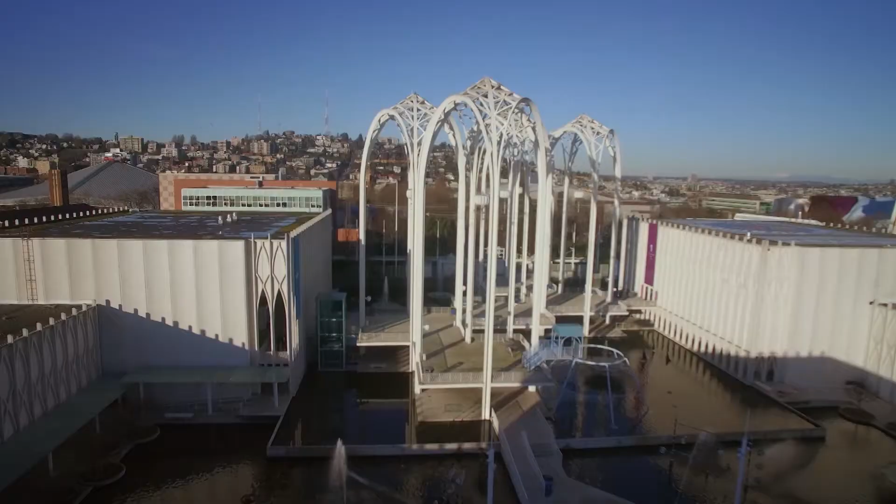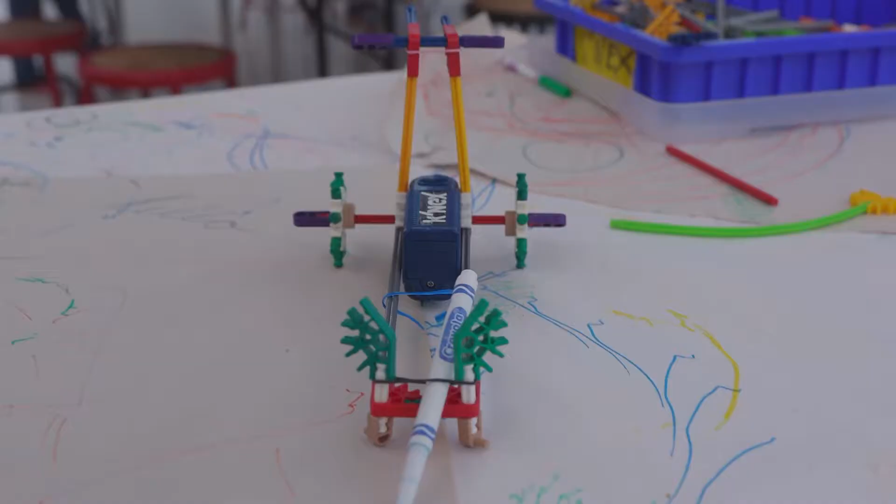For nearly 6 decades, Pacific Science Center has been the place to ignite your curiosity and to experience discovery, experimentation, and critical thinking. My favorite things are going to see the bugs and the butterflies. I love the laser light show. 3, 2, 1.

For years, Pacific Science Center has been a partner with the school systems around the state to bring science into the schools in a way that enlightens science education. We serve over 1 million people every year, several 100,000 out in the community through our outreach programs, most notably Science on Wheels. Look to your left, look to your right.

More than 85,000 of those students this year will be part of low-income families. Yes, if we squeeze it.

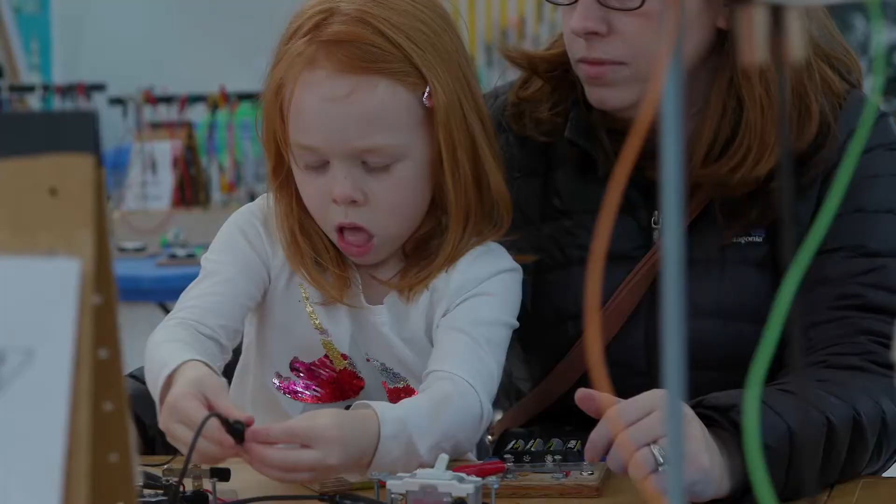We want to be a laboratory, a living room where conversations about science take place. We have undertaken a comprehensive program that includes deeply discounted memberships for anyone on public assistance, that provides free memberships to any child up to age 21 in the foster care system or experiencing homelessness.

Accessibility is really important for us here at the Science Center. When you work at a place where you see so many excited people and so many inspired people running around, we just want to make sure that people all over the state, from whatever backgrounds they come from, are able to enjoy that with equal access.

One of the big changes that I see in Pacific Science Center is its effort to be increasingly relevant to our innovation economy in this area. We have startups now that bring what is reality to life for people who have no idea about where all this future technology is coming from and what it's enabling.

We're just thrilled to be collaborating with NHL Seattle. It's consistent with our goal to be a platform for innovators. And what we're hoping is that people will come here and see this preview center and be inspired, but they'll also be inspired by what's happening right next door on the other side of this wall at the Pacific Science Center. We are really, really excited about our new evening series that will be showcasing science and technology of sports and entertainment.

You think about the game of hockey from a science standpoint. Physics play a big role in the game and geometry, and so the ability to explain our game and what we're doing through a partner who's in that business is really remarkable. Seattle is really a wonderful place for innovation and invention, and we've really brought into the building some of the latest, coolest technologies that are going on in our community.

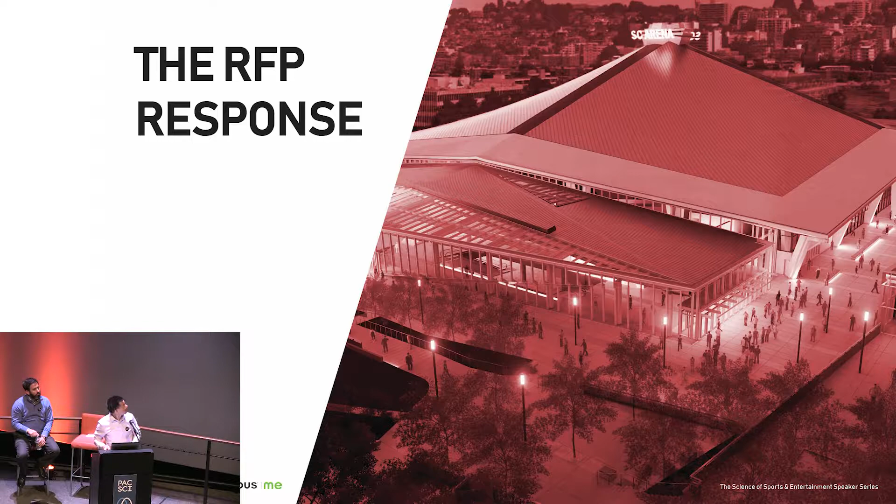Let me advance to the next slide. Okay, so what I'm going to do to start is talk you through some of the evolution of the design process. Like Sean mentioned, this project has been in the works for a couple of years already, and it has flown by. Right around the first of the year in 2017, the city of Seattle issued an RFP for the redevelopment of the arena. I'm not going to go into all the details of this RFP because it's quite extensive, but I will highlight a couple of the primary goals that you'll see on the screen as well.

Of course, the world-class arena for music, entertainment, sports, the NHL, the NBA, and to design and operate the arena to really enhance the connection to the Uptown neighborhood, integrate with the vibrancy of Seattle Center, and to align with the Seattle Center master plans. This building uniquely is part of a campus, and not a lot of the professional arenas that we do have that type of scenario. So it really does need to respond to the urban context, the neighborhood context, and the campus that it lives on. That's been a real important part of our design.

So that's where our job began, and our first step was to essentially create a framework of design principles or design goals for the building, much like the goals that were set out for the RFP. We drew from several influences: our collective expertise on NHL and NBA arenas and sports facilities in general, and the historic arena itself, dating back to 1962. And so here's what we came up with.

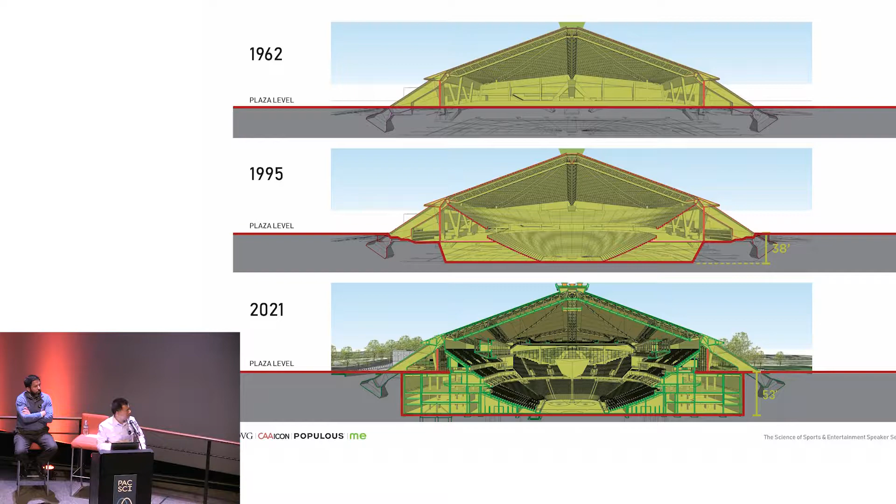And we chose to locate that on the south side of the arena. We've kind of rotated the plan on you, so north is to the left. But we chose to take advantage of that kind of newfound space that Sean also discussed. The current service end of the building where the loading dock is and the marshalling area, turning that into kind of a new front door. And I'll talk a little bit later about how we're able to do that from a service and a load-in, load-out standpoint. But we looked at adding the new entry atrium on the south.

And at the time, there was a parking program, an on-site parking program for approximately 850 cars that we were also looking to accommodate. So that was basically between the new atrium and Thomas Street. But what it did was it aimed to create a new gateway, really a new gateway and access point into Seattle Center along Thomas Street, extending from kind of the west edge of the center out to Uptown.

And so those were kind of two of the primary moves in the RFP phase. You'll notice, and I'll touch on this a little more later, but across the street - so this is the Bressi Garage where Pottery Northwest is currently.

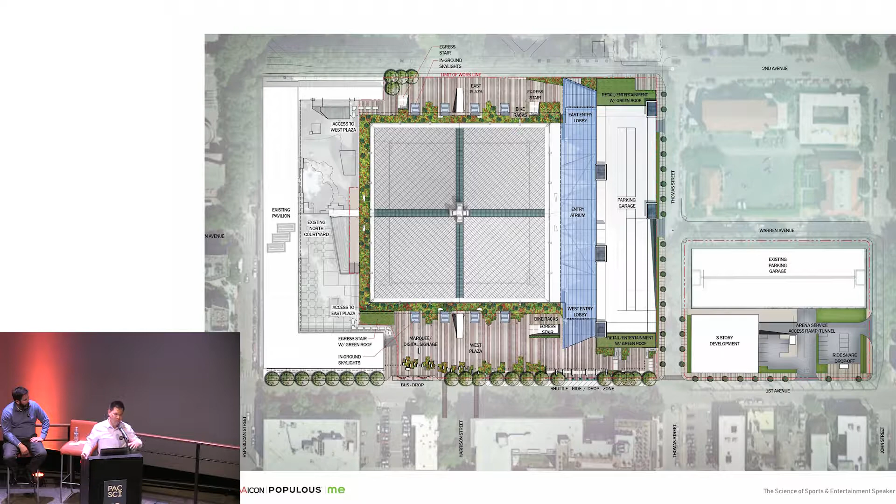One thing that was also really one of our major design principles was exposing some of the glazing on the north side of the building from within the seating bowl. Currently in Key Arena, you can't see the exterior from within the seating bowl space—the seating bowl itself kind of shrouds the space, it wraps the space, and you're cut off from the exterior.

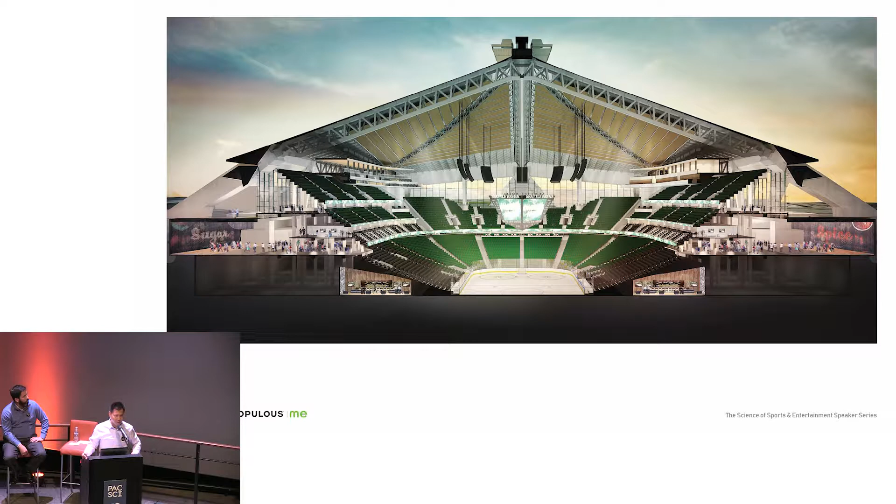So a couple other quick renderings showing the initial proposal. This was the atrium that we first came up with—this was, again, almost two years ago. You can see kind of the remnants of the parking garage that existed then.

And then a section cut through the new south atrium. One of the principles at the time was to really celebrate this new internalized south foundation, or the south buttress as we call it, that is going to be the unique one out of the four, because it will become internalized and celebrated within this new multi-story atrium. That has held true through the design evolution to today—that south buttress is really going to be celebrated in the new entry hall, and I think it's going to be a magnificent feature.

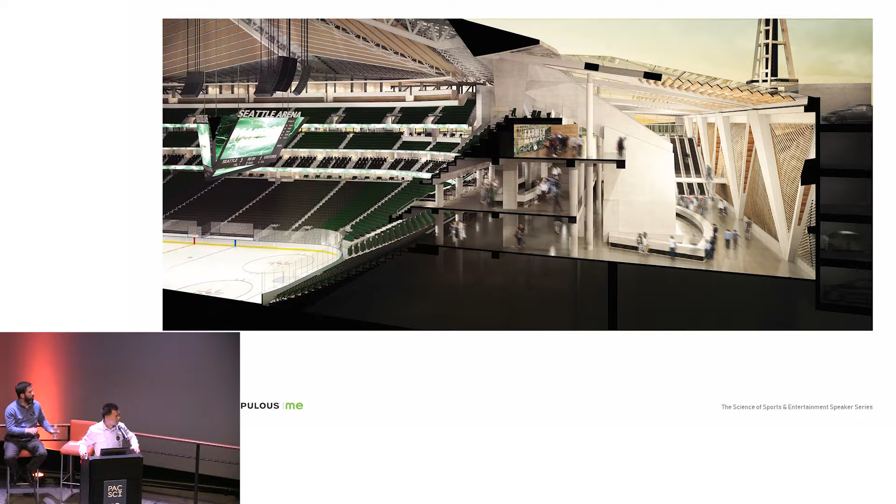And then again, about a no-compromise design. From day one it was all about hosting world-class events, the variety of events that the city will want and love to see in this building. So we're always thinking and designing not just for a sport, not just a couple of sports, but the whole breadth of entertainment and sports that are out there in the industry.

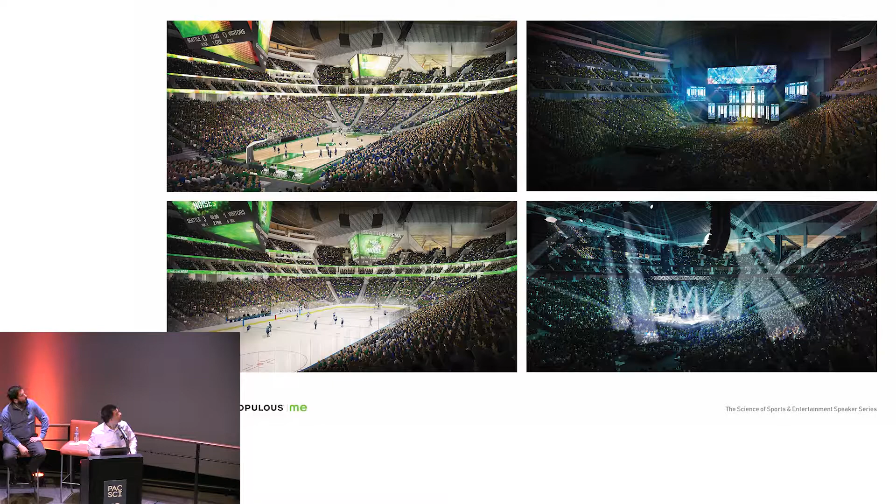So, design evolution—fast forward a couple years. It feels like my job is tough tonight because I have to cram two years of design evolution into about 15 or 20 minutes. But there were a couple significant events that occurred after the RFP phase that I think ultimately drove the design evolution, or most of the changes to the design.

I think first and foremost, the development team, Oak View Group, determined that the south side of the arena should be even more pedestrian focused. Initially we talked about it turning into a pedestrian and vehicle new gateway into Seattle Center.

I think they made a commitment that it wanted to be all about pedestrians, just like the other plazas surrounding the building on the east, the west, and the north sides. So that was one element.

The second was that the arena received its official historic designation by both the local Seattle Landmarks Preservation Board, as well as the National Register of Historic Places, like Sean mentioned. Those two things became official after the initial proposal, and then we went through a rigorous process of review, evaluation, and approval by those landmarks entities, and they've really helped shape the design, and I think it's absolutely for the better.

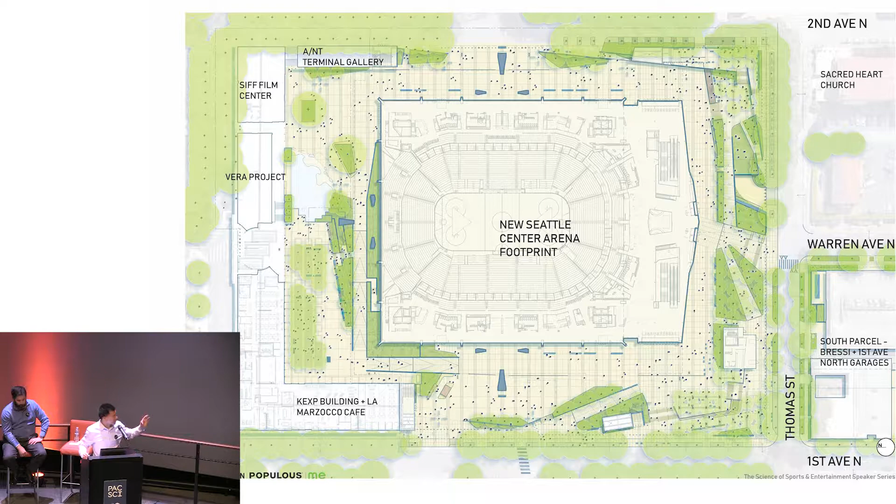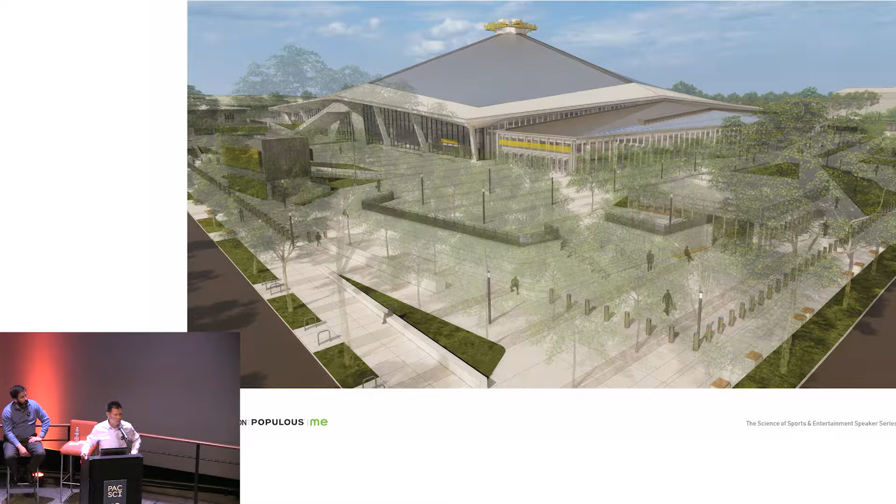So that gave us the opportunity to establish this transparent lens into the historic building that Sean mentioned. The design of the atrium, which we'll touch on more later, is really about maintaining views, sight lines, and celebrating that historic structure beyond it. It almost wants to disappear—it's a transparent lens, a transparent layer through which you can see that historic structure.

So this is the current site plan, and you'll notice a few changes compared to the one we showed previously. First off, the atrium got substantially shorter in its length. It was 440 feet long in our initial proposal, accommodating a lot of new lobby space, circulation, stairs, and escalators. It was a circulation spine for the building because we're digging so deep into the site.

We need to move people efficiently with stairs, elevators, and escalators. So it was 440 feet in length, and through our processes with the local landmarks board and the National Park Service as well, I think we all came to a consensus that the atrium structure and its architecture really had to be secondary in every way to the historic roof. At 440 feet, it was extending beyond the length of the original building on the east and west sides. The dimension of the current arena from one side to the other is 360 feet.

So we worked really hard to create a more efficient design, consolidating some things in the atrium space to reduce that overall length, and in the floor plan view you see here, made sure the atrium was no larger than the historic arena itself. There are a couple other strategies we'll look at here in a bit that also help that atrium remain secondary to the historic roof.

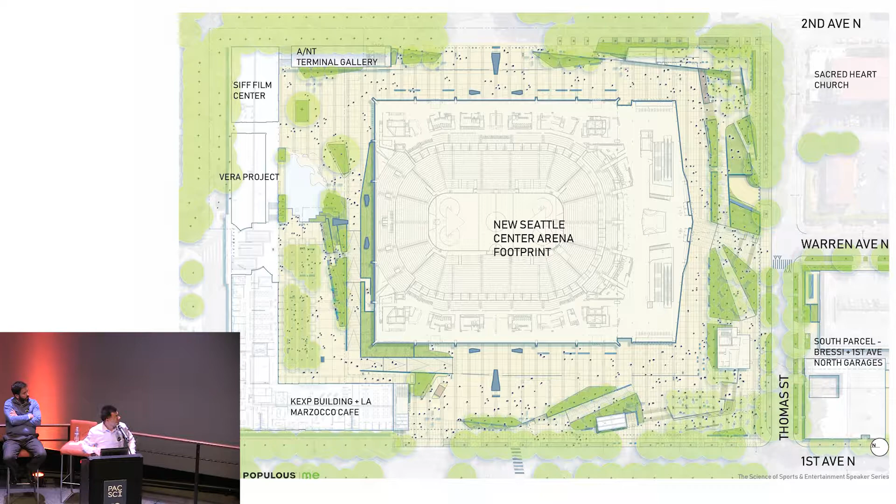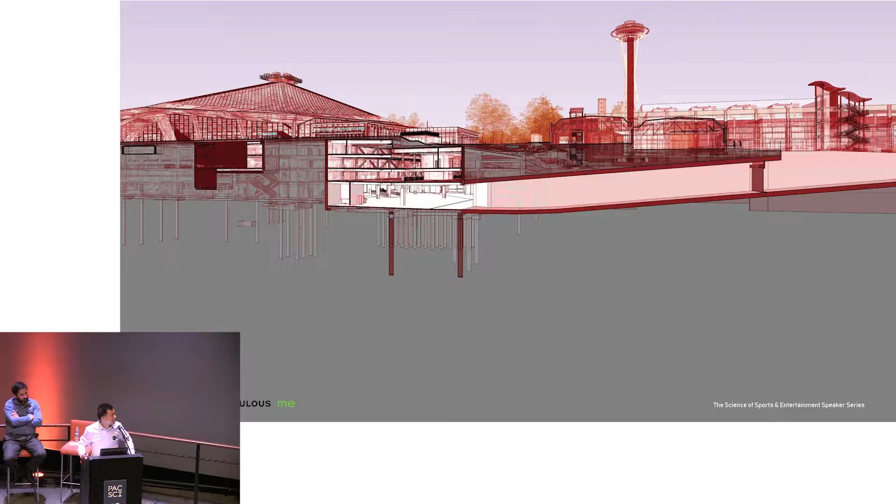So I think, again, Sean mentioned this arena doesn't really have a back door like a lot of maybe urban or civic arenas do. And I think this was kind of our design solution to allow that to happen. And then here's a quick image showing the current design and the design of the atrium. Again, you may notice a little bit of design evolution there from the initial proposal renderings.

Again, that idea about always making that atrium secondary in its form, its height, its scale, even its materiality, make it secondary from the historic roof. So here you can see that the materiality is very distinct. So there's always that distinction between the two. That's something that's very critical in the world of historic landmark design. Any new addition wants to be visually distinct from the historic structure. So we're doing that through materiality.

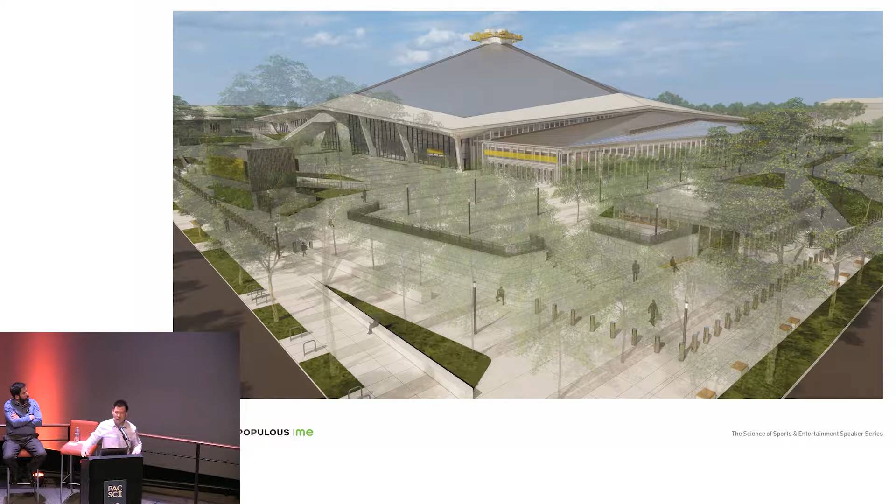You can see that the scale and the height of it is also secondary. It always maintains your view to that historic roof line that is so powerful, and that will now be very visible from the southern portion of the site and beyond. And then, like I said, the reduction in the overall length of the atrium allows essentially the corners of the historic roof overhang to always extend out past that new atrium east and west facade. So you're always going to read those prominent corners of the historic arena.

So one thing I want to talk about here, there are a few other pieces to the architecture that I would say are very unique, again, because of this subterranean nature of the building. And Jeff will get into a lot more detail on how these elements operate. But the new architecture, the visible architecture, like we've been discussing, is really limited to the atrium. The other three sides of the building are essentially refurbishment of the historic facades. We're not touching the roof. And so where's the rest of the architecture here?

And what's interesting is it has basically become these 4 or 5 much smaller site buildings that serve very specific functions. And I'm going to talk to you about what those functions are from an architectural standpoint. But you can see them here. They're essentially pulled away from the building so that they don't impact, again, that historic look and feel of the building or those historic views to those facades. They're pulled out to the site perimeter or the site edges.

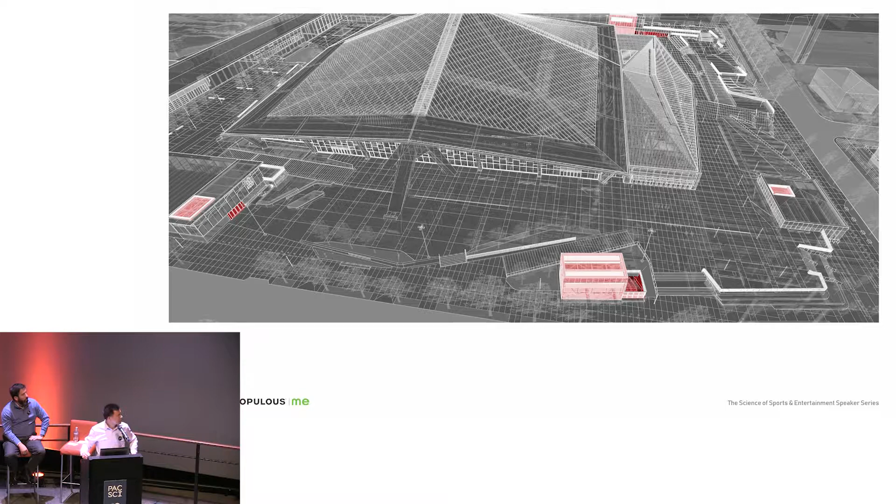And if we do a little bit of a cutaway section, this is from the same vantage point, you'll see that they're essentially a termination point for some underground tunnels, for lack of a better term. We've nicknamed these elements the snorkels. So Jeff will tell you what the snorkels do, but I bet some of you have an idea based on that name what they do.

From a circulation standpoint, everyone's been in public assembly buildings, arenas, stadiums, exit stairwells, right? Important thing. Usually you're taking a stairwell down to some point and then exiting it. Great. In our case, you might be taking a stairwell up and then across horizontally through a tunnel and then out to the side. It's been a really interesting part of the design and challenge that we've had to deal with. But effectively, if I were to trace a line around the seating bowl, that's kind of where the historic facade exists above. So this starts to show you the amount of expansion that's happening here below grade.

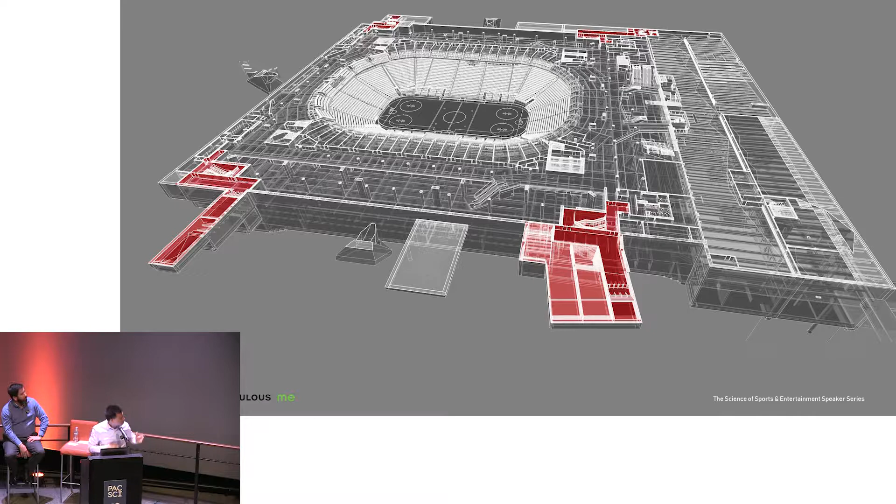And when we bring these stairwells up in the corners of the building, they're outside the original footprint. So our strategy was to push them even further out into the site so that they don't detract again from the historic landmark. So that's what that graphic is trying to show. These last few images here will be another series of cutaway sections. So this is an aerial view looking at the atrium, looking to the north. And again, you'll see the scale and the size of the atrium in relation to the historic roof, always secondary.

Maybe I'll ask a question to the audience. There's a skylight right here. Anyone have an idea why it's shaped like that and why it's positioned right there? There you go. I think I heard it. Yeah, a lot of you guys got it right away. Yeah, it is an absolutely amazing vista up to the Space Needle. Obviously, one of Seattle's iconic landmarks as well. So from within the building and within that new atrium, there's going to be just a phenomenal connection to that local Seattle landmark through that skylight.

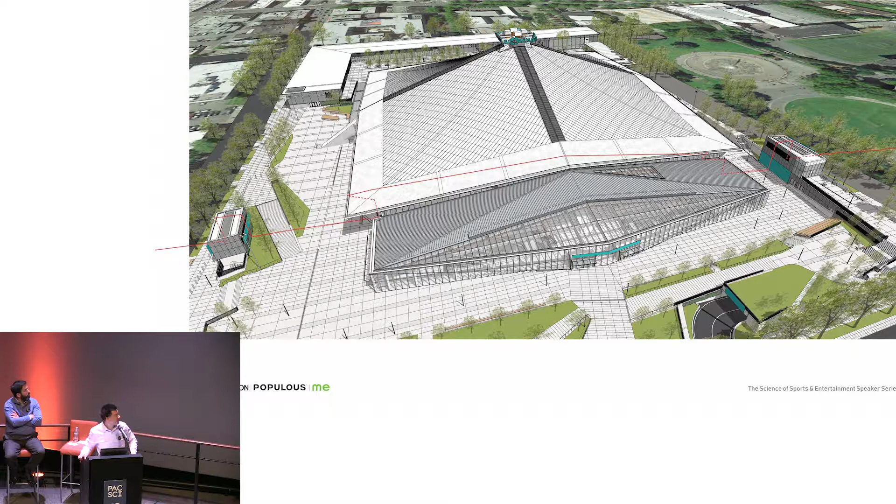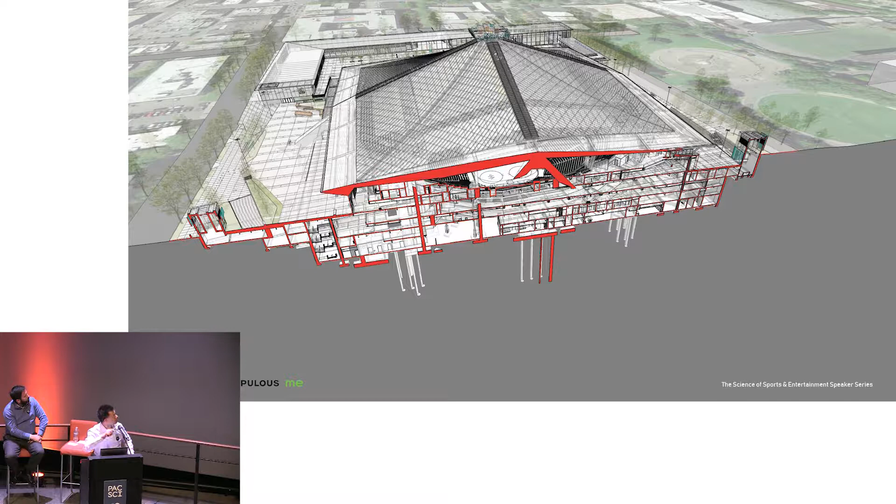So cutting away the section again, this shows you the amount of design work and engineering that's going on below the surface here. It's that iceberg concept that Sean mentioned. And I'll highlight a couple areas here. These are essentially the plazas. So that's the East Plaza along 2nd Avenue. Here's the West Plaza, basically along 1st Avenue. And you'll notice that the building extends clearly underneath them to these perimeter buildings that I mentioned earlier that allow exit stairs and corridors to get up and out of the building. And then Jeff will tell you what they also do.

And so here's just kind of another view, but really an amazing feat to dig down an additional 15 feet from where the event floor is today, expand that footprint on all 4 sides, hold that historic massive roof in place temporarily during construction while we're carving the earth out from underneath it. I can't wait to see it under construction, see photos of it. I may or may not stand down there while it's being held up above me, but it's going to be fascinating to see.

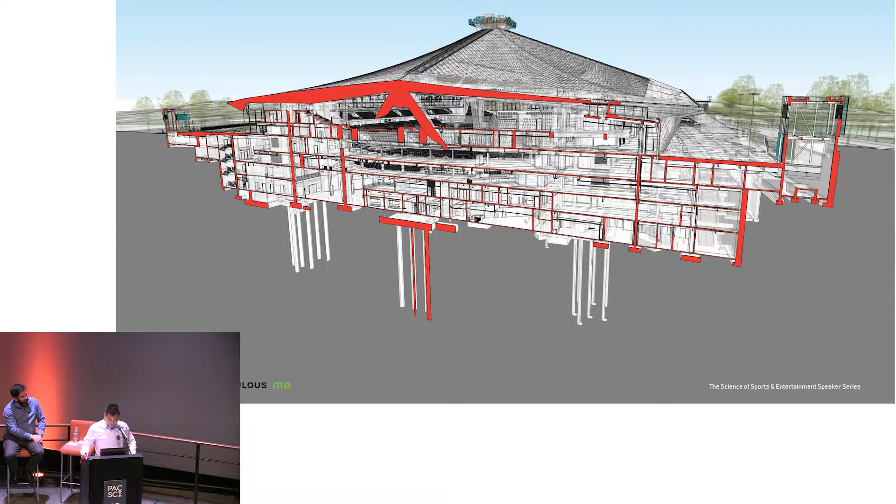And I think this is just another view to kind of show a different angle of the atrium. But one thing that we thought was important to do, again with the design of the atrium, was to have this more contemporary form to it. The historic building has that deep overhang, created by the concrete edge beam that are held up by these Y columns, as we call them, because of their form. That deep overhang creates that dark shadow line around the edges of the facility.

And the new atrium really takes the opposite approach. So it has a very clean edge to it. It's very transparent. And so there's that distinction again, kind of that contrast between the two elements that we think is critical to the design.

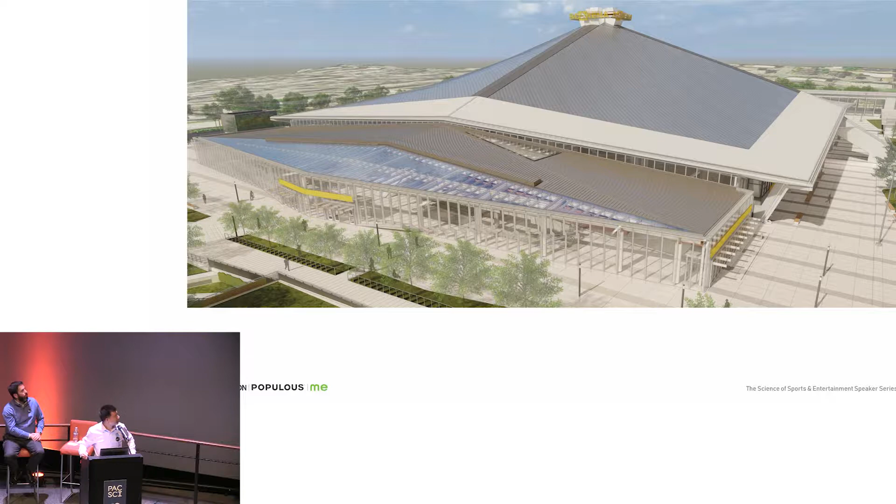And so here's maybe a pedestrian level view of that new South Plaza. So think again about what is there today. There's a pathway that traverses the south side of the facility, and it has that stairwell that takes you down and then back up from east to west. And then otherwise, it's a lot of the service area of the building, the loading dock, marshalling yard, et cetera. So talk about a major transformation going from service side of the building to a new front door. We think it's going to be magnificent. We're very excited about it.

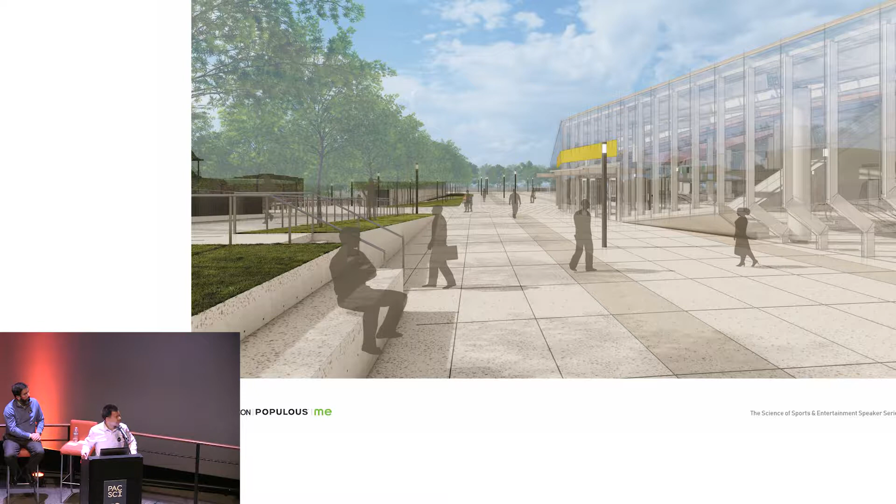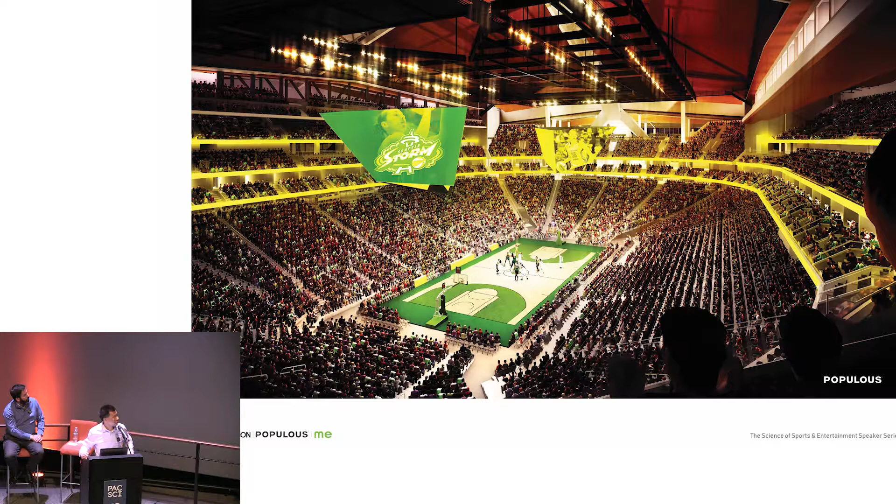And we're not, unfortunately, going to get into too much detail on the interior or the seating bowl today. Maybe a topic for a future talk. But a couple of recent renderings that we pulled together show the atmosphere and the experience that will be inside the new arena. This one's looking to the south towards the atrium.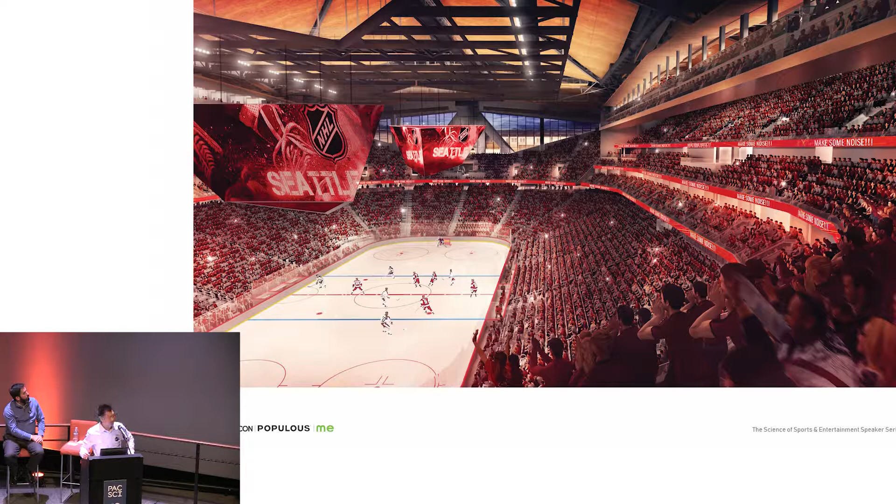So an image of a hockey setting looking to the north. Again, that kind of amazing picture window view that's going to open up towards the north courtyard, KEXP, and the resident organization spaces of Seattle Center. So with that, Jeff, I'm going to pass the baton to you. Thank you.

Am I doing on time? As usual, in the design process, the architect gets all the face time. The engineers bring up the rear, no problem.

So systems engineering, I was asked to come up with a couple topics to discuss. As was mentioned, we do a lot of these arenas around the world, and we do mechanical, electrical, plumbing, technology systems, telecommunications, security, those types of things. But there's dozens and dozens of engineering teams that are part of a project like this. Sean mentioned the crazy number of consultants on this team, and every one of them would deserve to be up here and present their topics. So I'm extremely happy and honored to get invited to this.

And I'm going to apologize up front. I got some head cold on Monday. I tried to sleep it off on the plane. My head blew up. I'm hearing this echo, it's very weird to be right here listening to this right now, so I'll do my best.

So inside of that, I'm going to talk a little bit about mechanical. I'm going to drill down to mechanical engineering, and I'm showing a skeleton of what we call mechanical systems. Mechanical systems in a building like this are how we move air and water around the building for comfort cooling. So what you're seeing here is a skeleton of ductwork, or sheet metal systems. We'll do heat transfer calcs to try to predict how hot it's going to get in there when you go watch this hockey game. And it's our job to put equipment in place to cool the building down.

And some of the challenges that we've come up with on this project, this is the most challenging one that I've worked on. I did Phillips Arena back in the day for your Atlanta team.

And it's interesting to see that not in the same light anymore, right? But I worked on Madison Square Garden, and we converted that thing with 600 events a year, staying live, and we tried to rebuild that for the Rangers team. This one, even more challenging for us. And space is at a premium, systems, cost, all that stuff comes into play.

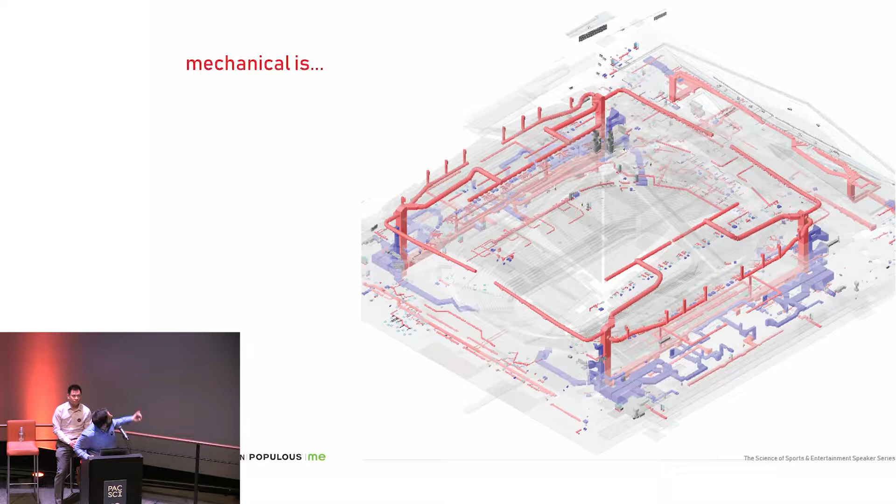So the things that I wanted to point out, I thought you might be most interested in: how do we take this building and deal with NHL compliance, which is a challenge in any building? How do we also take this? We've talked a lot about concerts, and other events are just as important for the function of this building. And what did we do? And then some common configurations of arenas that I think were extra challenging here. And Jeff kind of alluded to some of it, but those are just some of the elements.

And I tried to prepare a kind of a compare and contrast type look. That's an arena that we're designing on Long Island right now for the Islanders. It's much different just building on top of empty land. Looks a little bit less complicated, doesn't it? That team will tell you that's not true, though. I should be very careful.

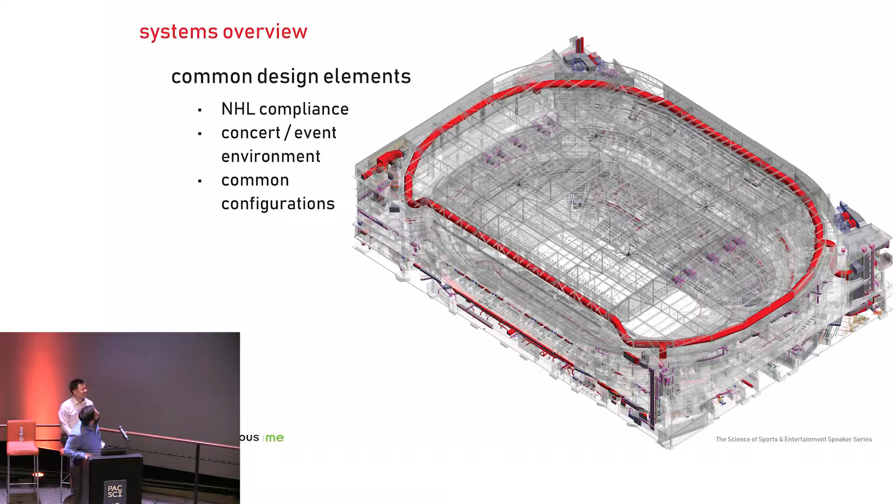So what is unique about NHL? So can I use this one? Okay.

NHL for dehumidification, I think this is probably pretty obvious. The arena has to have a dry, dehumidified environment. The NHL wants it cool and dry. You all live in, it's not a hot climate, and we talk about humidity, but you are a wet, damp climate. And so we have to use the system to respond to that. When I mentioned that Belmont arena, much hotter, more humid climate, humidity is relative, and in the worst months of the year for the NHL, the Stanley Cup Finals, it's starting to get hot and humid. So we have to pay attention to that.

So what we did here, this equipment, I'm just highlighting some of the stuff we put in the arena, was very unique. It's the first time we've ever done this. We have 8 dehumidification units that do nothing but dry out the outside air. And what's in there is, we call it a desiccant wheel. Most things you buy nowadays, shoes or food, you get the little packet of desiccants in there, and this is a commercial version of that. It's chemical. As the air moves through, it'll attract moisture out of the air and dry that airstream out. And then the wheel rotates to the top, and we bring another airstream in and heat the heck out of it and dry that wheel out so it can rotate back down and redo its job.

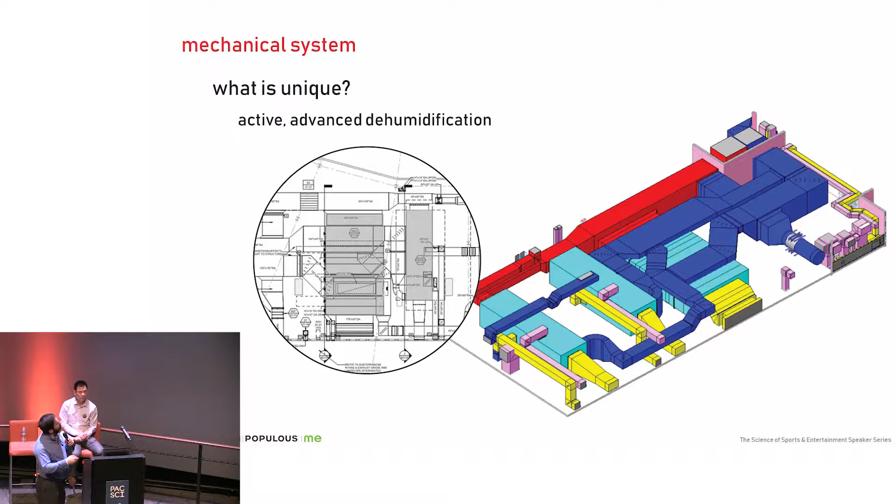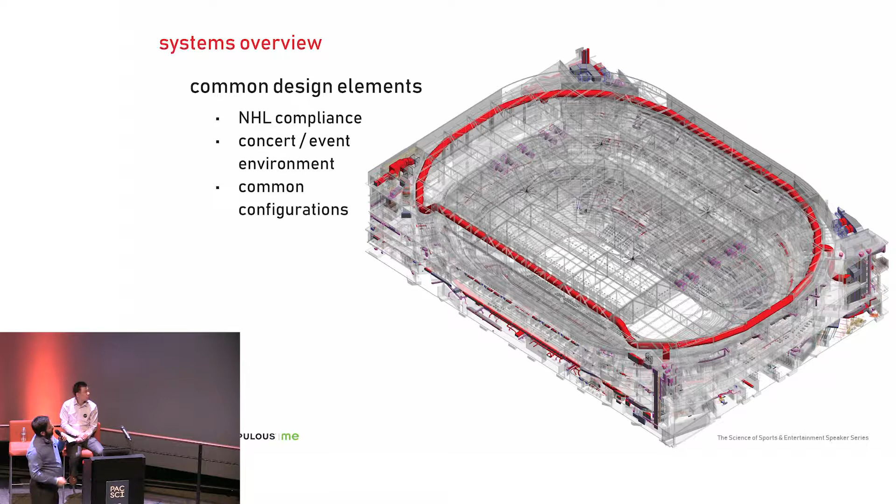So now we deal with concert environments. We've handled NHL conditions. What are we going to do in a concert environment? And here we have acoustic issues, and we want to be able to move air through the bowl. This is Belmont. So look at all the volume that I have there. Most arenas, not every arena, but most of them will have tucked up in the rafters the big round sheet metal duct, and that's what that's doing. Here we didn't have that kind of space. Because of the iconic roof, we didn't have the volume we normally have. I'd say most arenas were up in here with our ductwork and stuff.

So we came up with this strategy, but we split it. You walk in there now and there's a lot of that exposed sheet metal, and that all has to go for the new seating bowl. So we ended up with the split, and there's a riser back here that comes up, and we blow air across the top and we blow air this way. And again, we were fighting space constraints, but we realized this gives us an unprecedented amount of flexibility for concert events. What we always have a challenge with is pyrotechnics. People are moving smoke on the stage, and if we aren't careful how we're feeding the bowl, we can mess that up. We can blow that smoke around.

And we just need to be able to condition it at lower volumes and speeds so that people aren't impacted acoustically during the concert. So we can shut all these off individually at multiple locations around the venue. So when there's a half house event, which is when you curtain off pieces of the seating bowl, we can actually shut that air off and function a lot better than we do at most arenas, honestly. It's going to be pretty special.

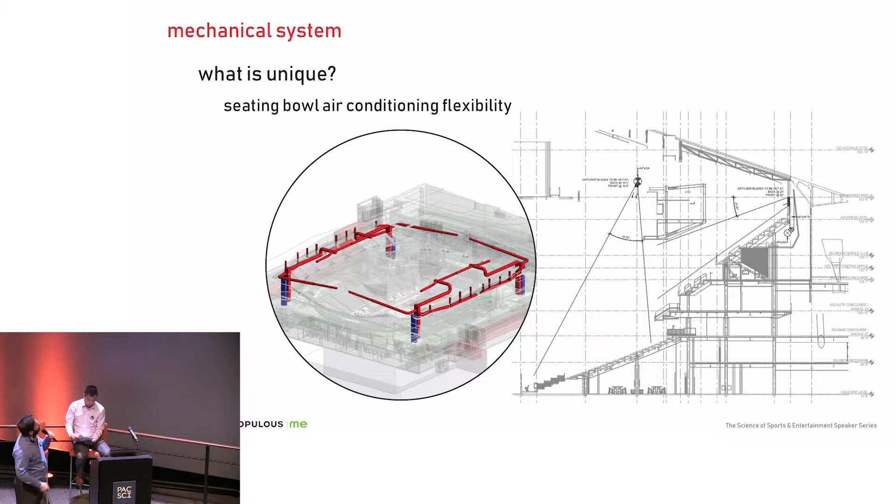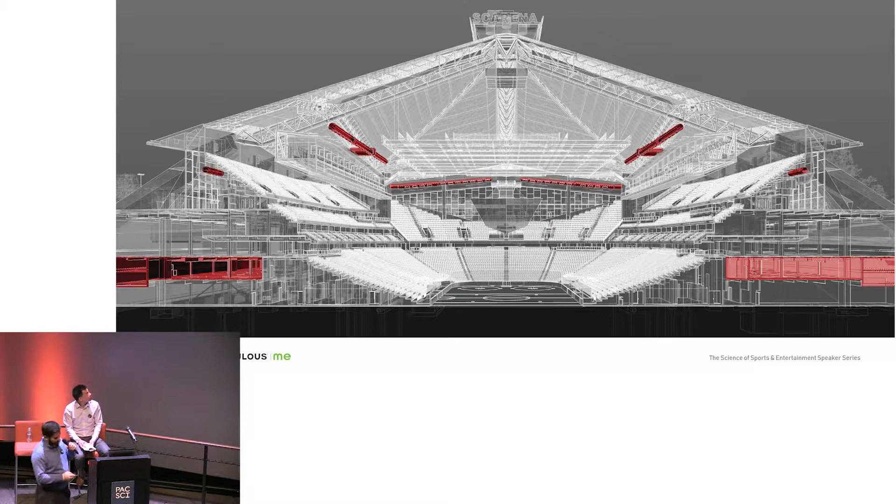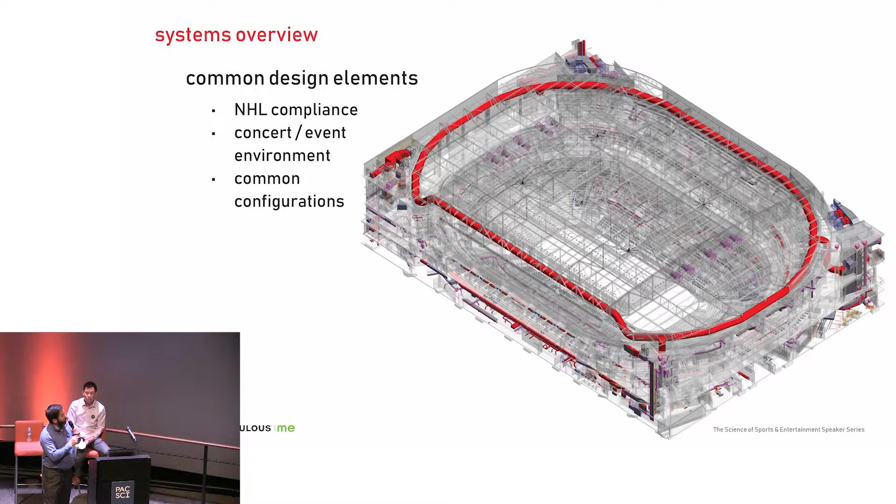This is a cutaway view of the same thing. So what you'll actually see in the bowl are these runouts. Okay. And now probably the biggest complication that we had, common configurations. So how does the building get air in and out? How does the building breathe? That's one of our big issues. You're always bringing fresh air into the buildings for ventilation, for indoor air quality, for human comfort. You're always taking the bad air out.

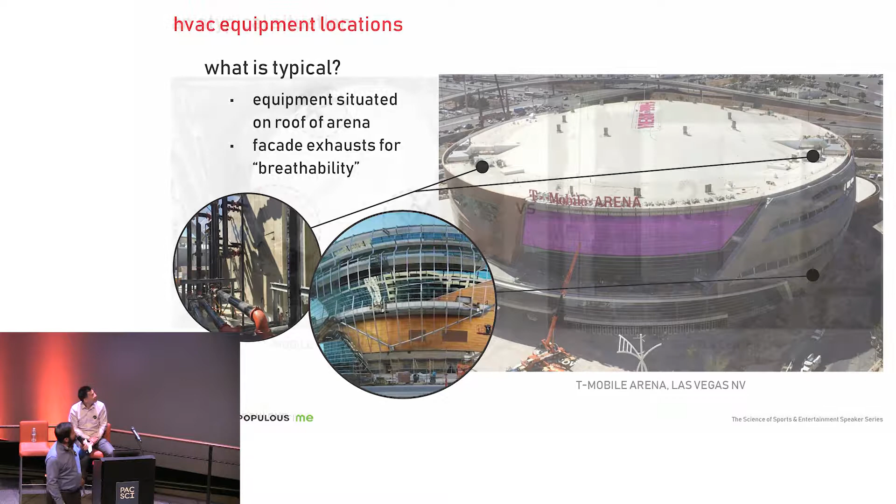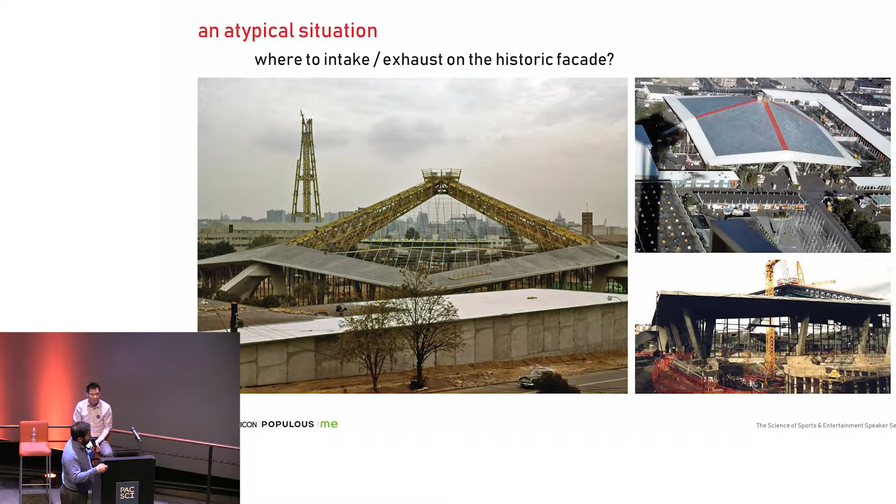Okay. So again, we threw this in here just to highlight. Look at the scale too. When you walk up to this building, the roof is highly visible, and so there's just nowhere to hide our equipment. And believe me, architects want to hide our equipment. So we had some kickoff meetings, and I dug this out of our design file. This is a result of one of the early meetings we had, where our concept became, how do we use this plaza? We have this extensive plaza.

Let's come up with a way to move air. We were thinking we'd integrate this with elements in the plaza. You'd have a seating area, and there'd be louvers underneath there, and air would be moving in and out. This really creative way to integrate everything. So you started to see us make notes: maybe air's coming in here, air's going out there, and we'd find these integrated elements. There's just too much. It got ridiculous. There was too much air coming in and out of the building. If you skateboarded here, we'd blow you over.

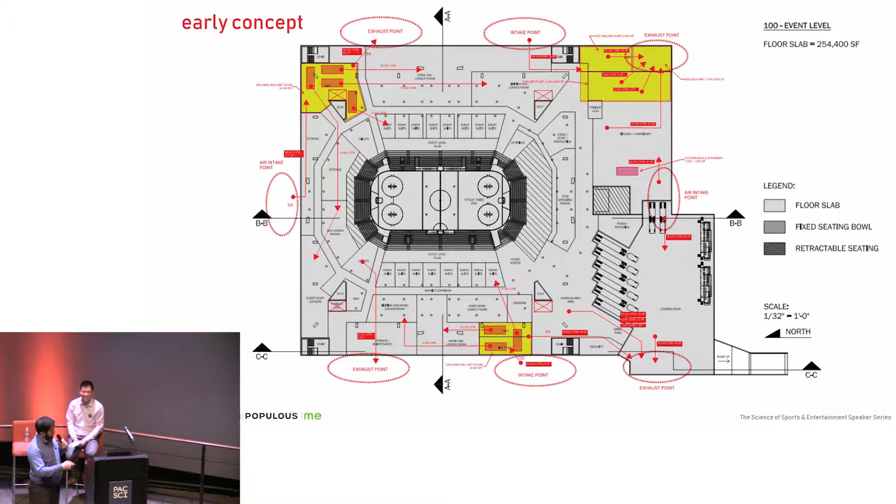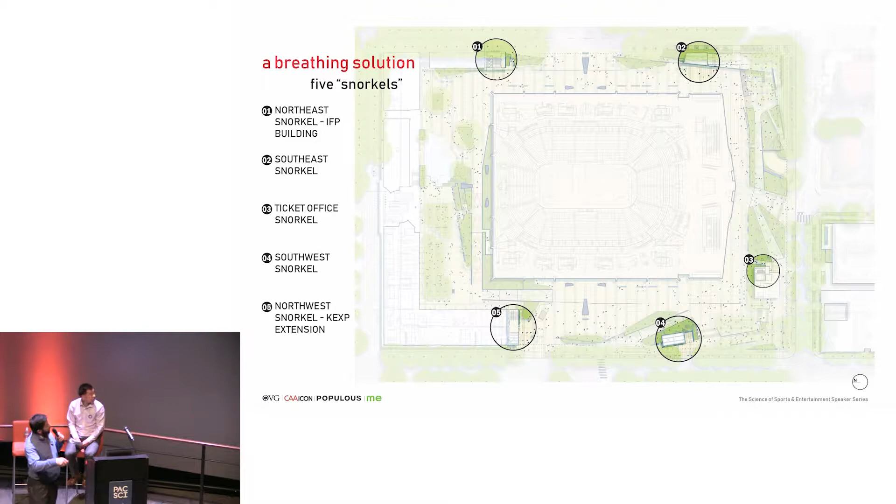Right? So that's where we ended up with these snorkel systems. And there's five shown here. One of them is actually primarily exhaust for the garage. But these elements actually became the targets. How would we get air in and out of the building? And Jeff mentioned the stairwells. Well, we decided to follow him to the edge of the building, and we built these air tunnels. So air is doing the same thing the people are to get in and out of the building.

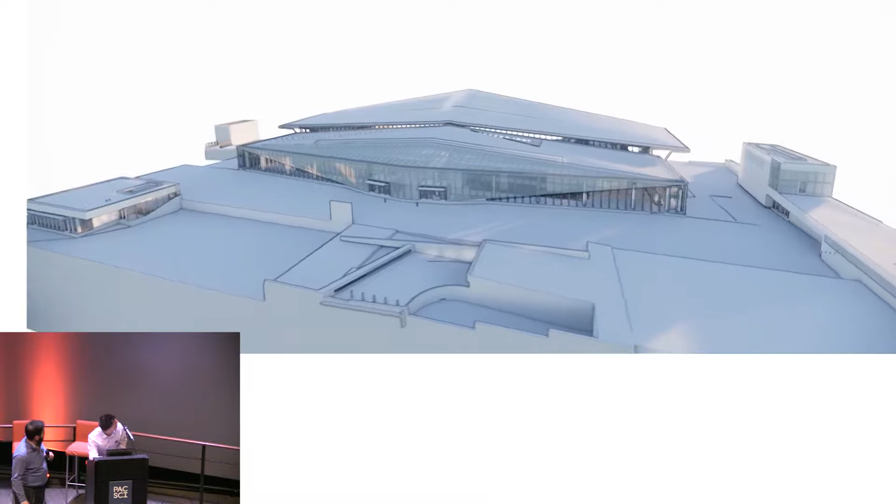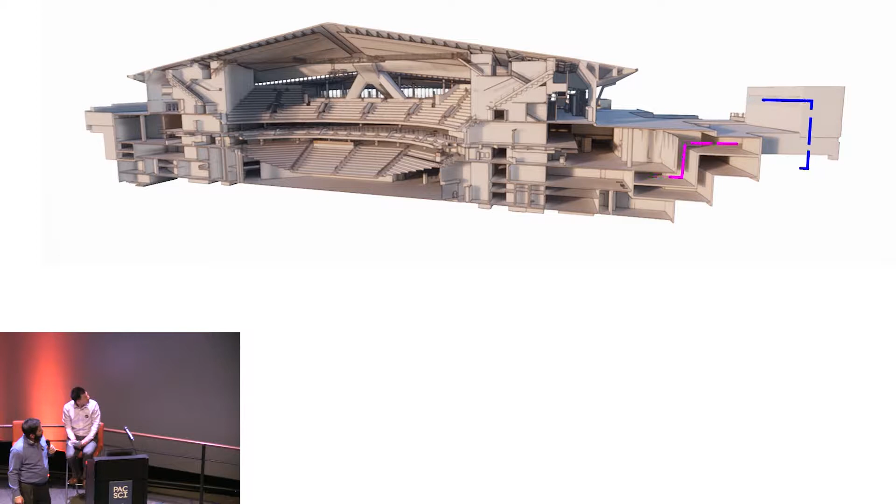And I actually showed this. Can you run that? This animation kind of gives you a sense of the scale and then where they're integrated. We should slow that down.

Okay. So those elements that Jeff's talking about, hidden in there are our points of exit and entry for air in the building. It's kind of neat. It's the way the building's going to breathe. And we're able to do that without making big dramatic impacts on the existing facade. So proud moment with that one, although many sleepless nights on how to make this actually work. But look at the end result. No one would think that this was... Jeff, would you talk about this?

I guess, like I mentioned, these perimeter buildings, these mechanical intake and exhaust and stairwell structures really became part of the architectural design of the building. They're detached from the building. They're integrated with other surrounding buildings. I see Tom nodding. Here is essentially an extension on the southern end of the KEXP space.

So it's fully integrated into that building, and it provides both a stair exit and the mechanical intake and exhaust that Jeff is referring to. But it takes on the architecture of that corner of the site. And I think what's really unique is this building really does have 4 sides. And even though the historic facades are identical, you would argue symmetrical, the environment or the plaza spaces that they exist in are very unique on all 4 sides of the building.

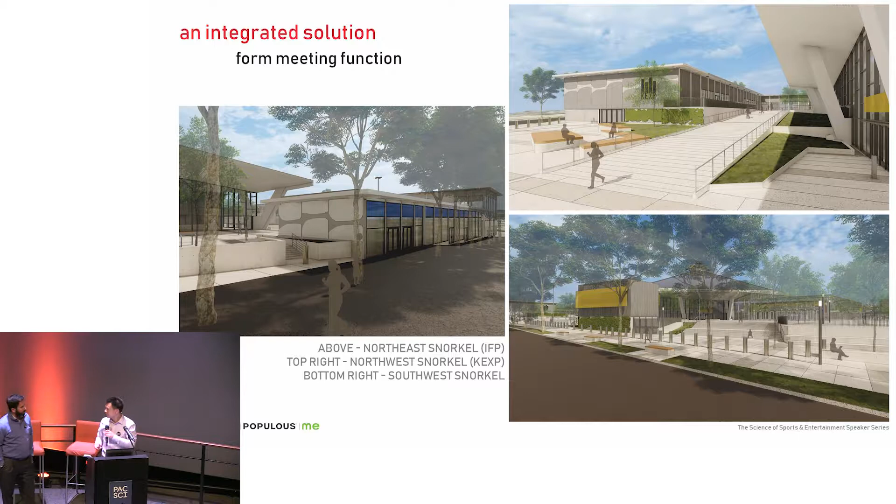I think the only other thing I wanted to say is, we get a lot of credit for designing buildings like this, but man, it's pretty special to be involved with you guys like Todd and Tim that have visions of building things like this, and Jeff and his boss Chris come up with these ideas, and we get to help make it work. That's what's neat about being an engineer, actually figuring out how to make these things work. Because day one, you're like, I don't know how we're going to do this.

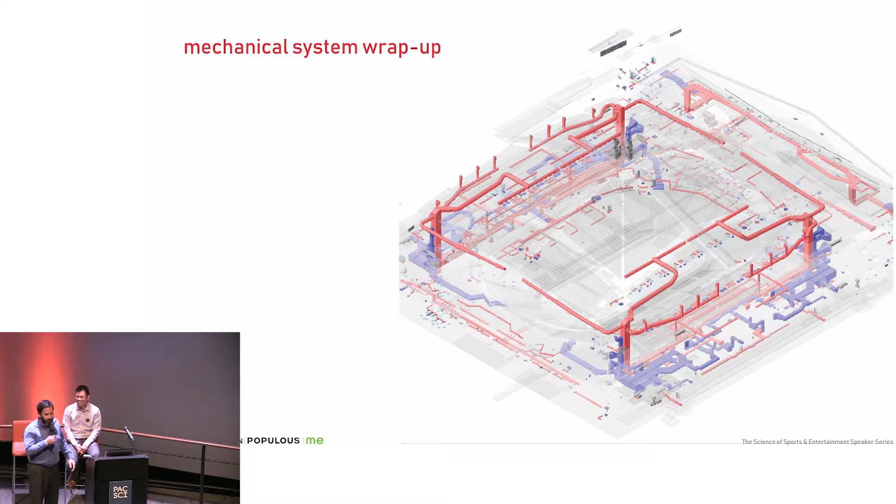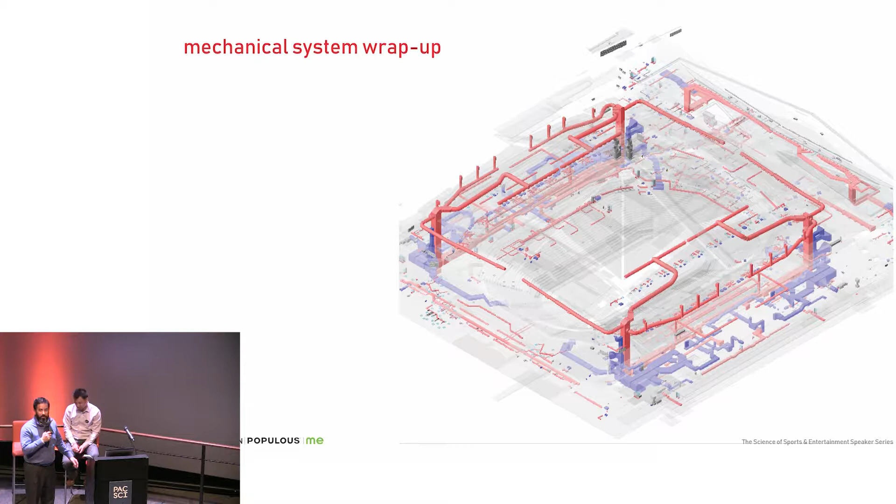Yeah, but now, you know what? The next step is going to be more difficult. I got to build it. Our job is going to be to try to do what we can to keep the intents intact, and the contractors, it's an amazing community up here. I've met lots of people in the construction industry up here, and they're going to do a great job. But that's going to be very interesting for us to watch. Hopefully, it works out perfect.